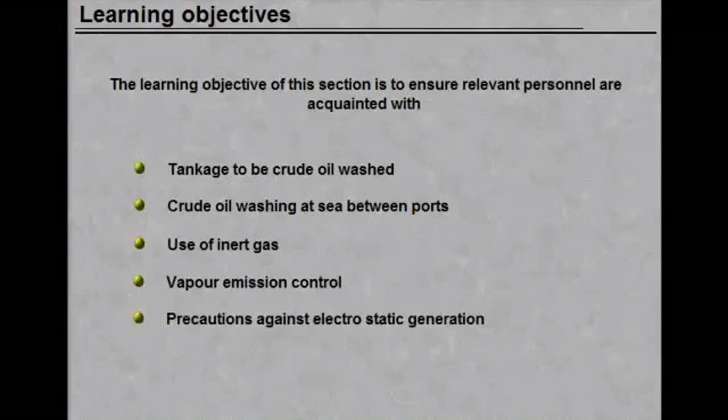The learning objectives of this section are to ensure relevant personnel are acquainted with: tankage to be crude oil washed, crude oil washing at sea between ports, use of inert gas, vapour emission control, precautions against electrostatic generation, and discharge of dirty ballast.

Before departure on a ballast voyage, after the complete discharge of cargo, the following tanks shall have been crude oil washed. A. All departure and arrival ballast tanks permitting compliance with trim and draft requirements under C and D below.

B. In addition, about 1/4 of the remaining cargo tanks on a rotational basis for sludge control. However, for sludge control, no tank needs to be crude oil washed more than once every 4 months.

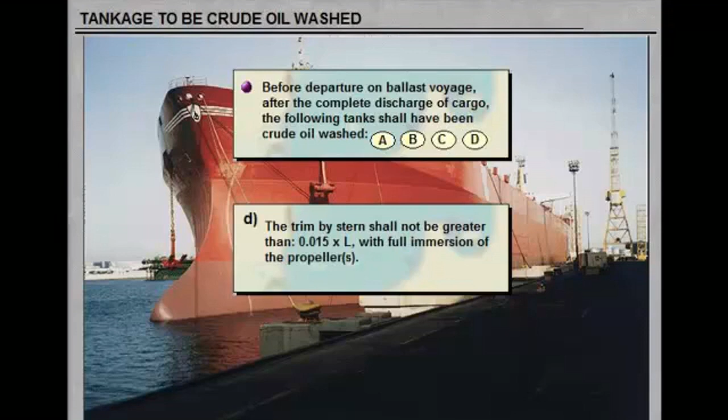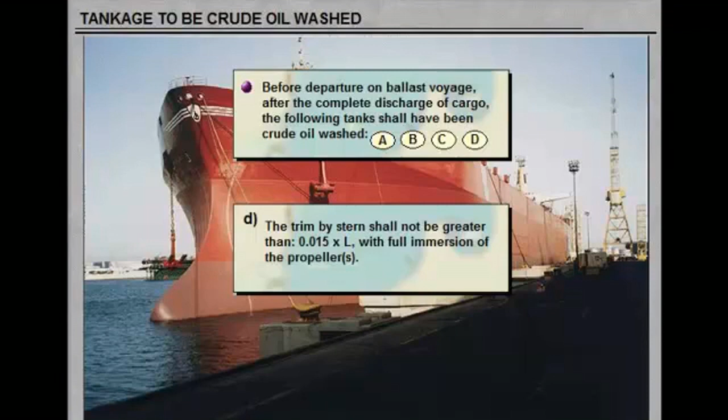C. The moulded draft amidships, DM, in metres, shall not be less than DM = 2.0 + 0.02 times the length. D. The trim by stern shall not be greater than 0.015 times the length, with full immersion of the propellers.

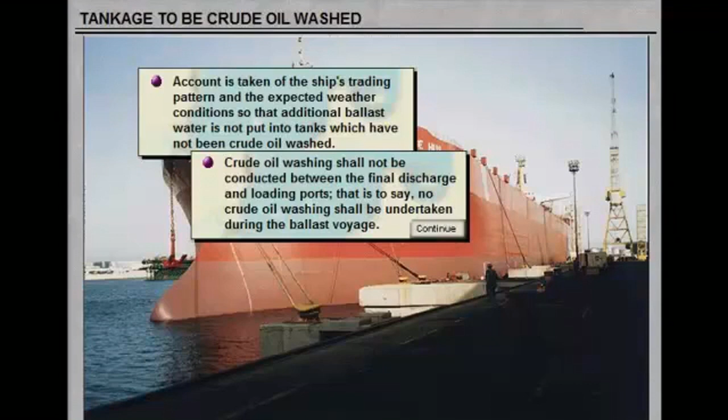Account is taken of the ship's trading pattern and the expected weather conditions so that additional ballast water is not put into tanks which have not been crude oil washed. Crude oil washing shall not be conducted between the final discharge and loading ports. That is to say, no crude oil washing shall be undertaken during the ballast voyage.

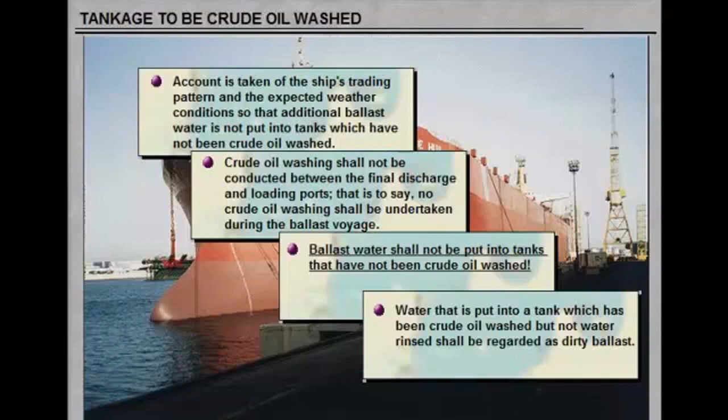Ballast water shall not be put into tanks that have not been crude oil washed. Water that is put into a tank which has been crude oil washed, but not water rinsed, shall be regarded as dirty ballast.

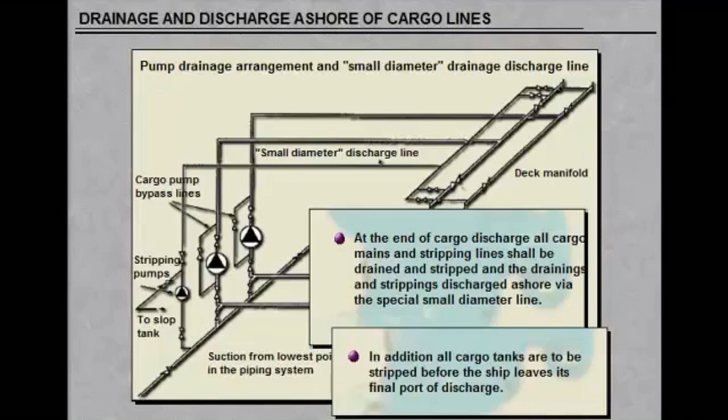At the end of cargo discharge, all cargo mains and stripping lines shall be drained and stripped, and the drainings and strippings discharged ashore via the special small diameter line. In addition, all cargo tanks are to be stripped before the ship leaves its final port of discharge. All crude oil washing must be completed before the ship leaves its final port of discharge.

Where any tank is crude oil washed while the ship is at sea between multiple discharge ports, the tank shall be left empty and available for inspection at the next discharge port, before commencing the next ballast voyage. This inspection may consist of multiple sounding or dipping of the bottom of the tank when the tank is empty.

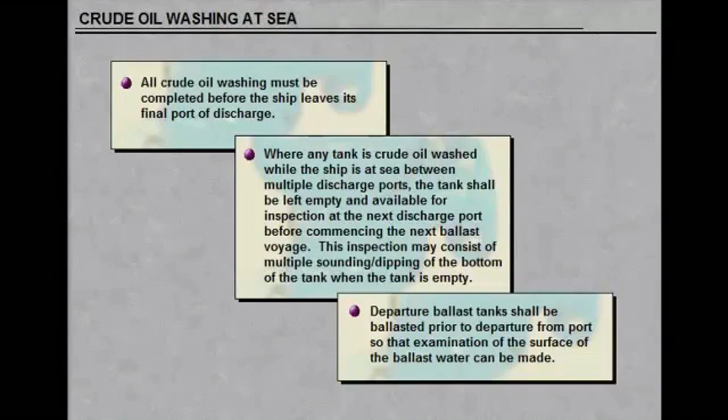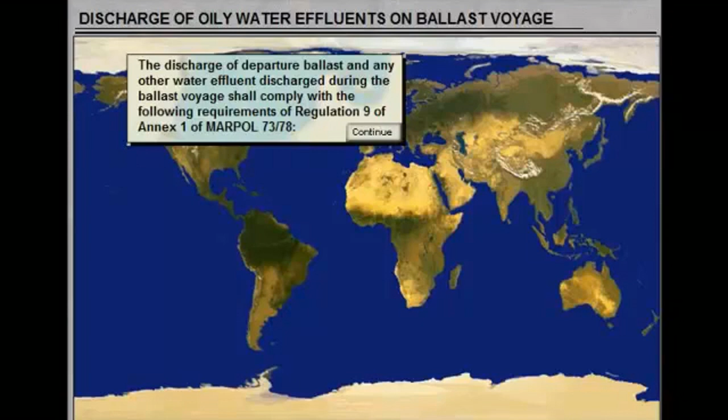Departure ballast tanks shall be ballasted prior to departure from port, so that examination of the surface of the ballast water can be made. The discharge of departure ballast and any other water effluent discharged during the ballast voyage shall comply with the requirements of Regulation 9 of Annex 1 of MARPOL 73/78.

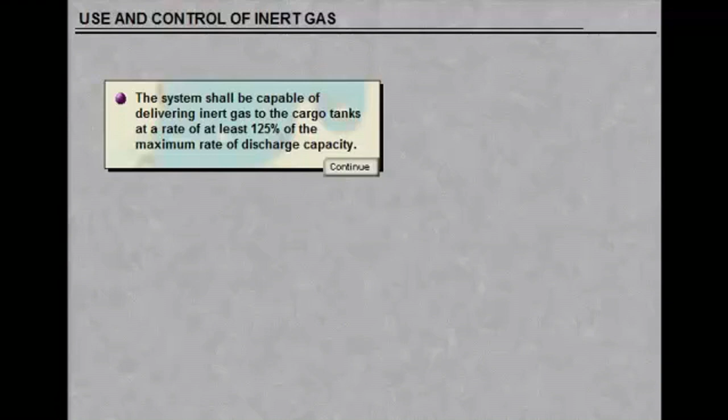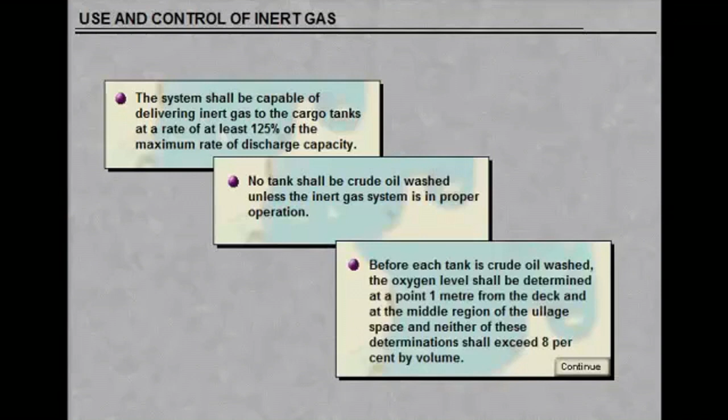The system shall be capable of delivering inert gas to the cargo tanks at a rate of at least 125% of the maximum rate of discharge capacity. No tank shall be crude oil washed unless the inert gas system is in proper operation.

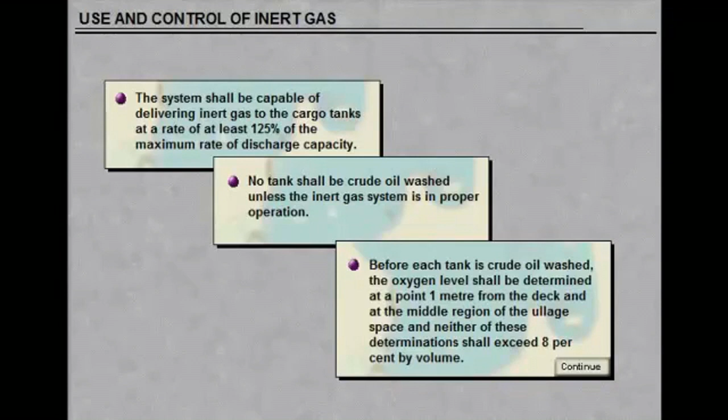Before each tank is crude oil washed, the oxygen level shall be determined at a point 1 metre from the deck and at the middle region of the ullage space, and neither of these determinations should exceed 8% by volume. The oxygen level of the inert gas being delivered during the washing process shall be continuously monitored.

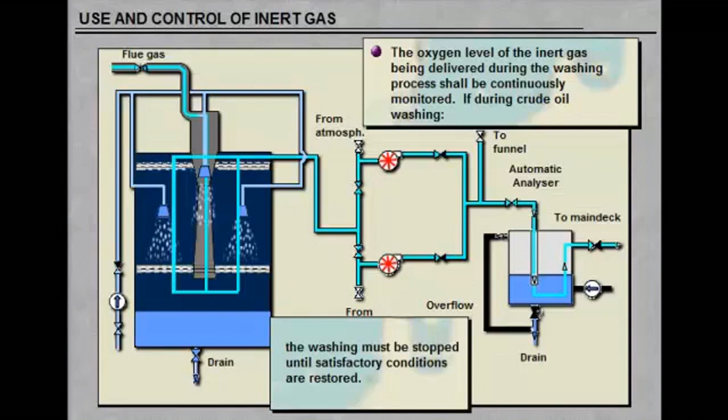If during crude oil washing, A. the oxygen level of the inert gas being delivered exceeds 8% by volume, or B. the pressure of the atmosphere at the tanks is no longer positive, the washing must be stopped until satisfactory conditions are restored.

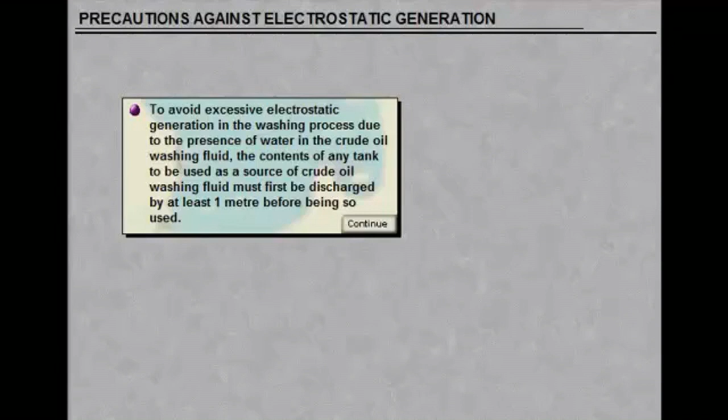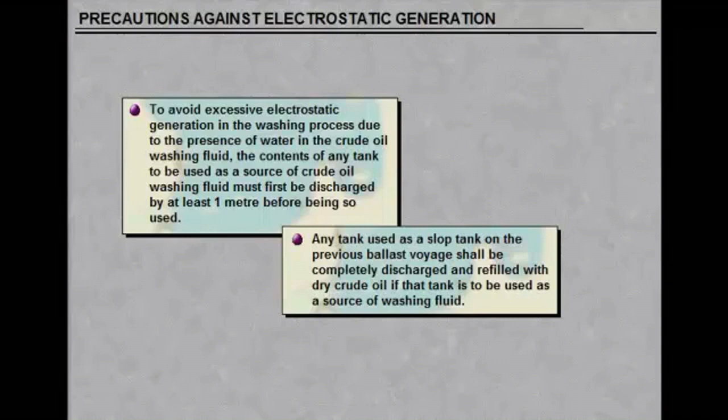To avoid excessive electrostatic generation in the washing process due to the presence of water in the crude oil washing fluid, the contents of any tank to be used as a source of crude oil washing fluid must first be discharged by at least 1 metre before being used. Any tank used as a slop tank on the previous ballast voyage shall be completely discharged and refilled with dry crude oil if that tank is to be used as a source of washing fluid.

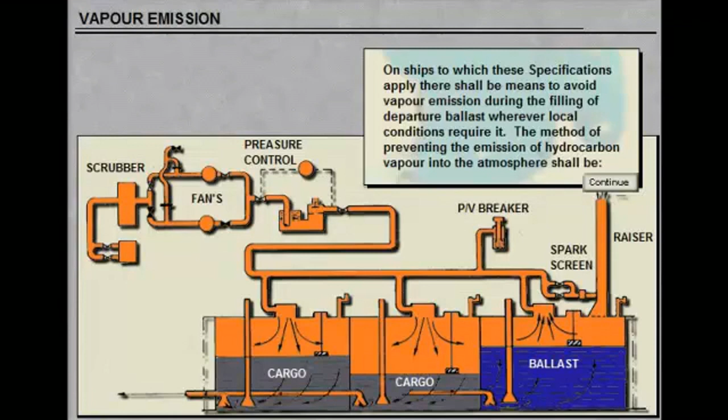On ships to which these specifications apply, there shall be means to avoid vapour emission during the filling of departure ballast, wherever local conditions require it. The method of preventing the emission of hydrocarbon vapour into the atmosphere shall be: A. by the use of segregated ballast tanks, wherever these are sufficient to provide the minimum departure draft, or

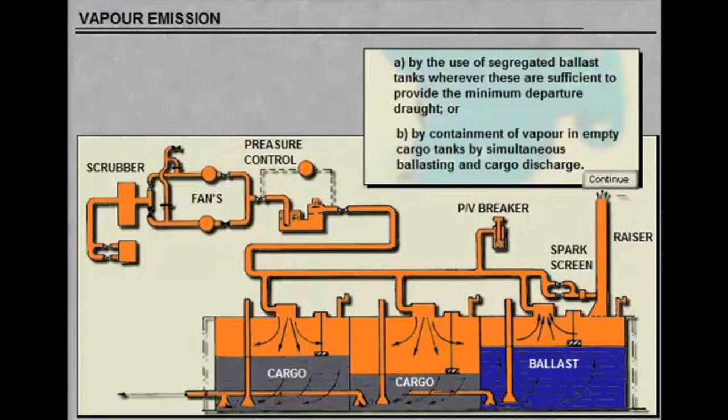B. by containment of vapour in empty cargo tanks, by simultaneous ballasting and cargo discharge. Alternative methods that are satisfactory to the administration may be accepted, provided an equivalent degree of environmental protection is provided.